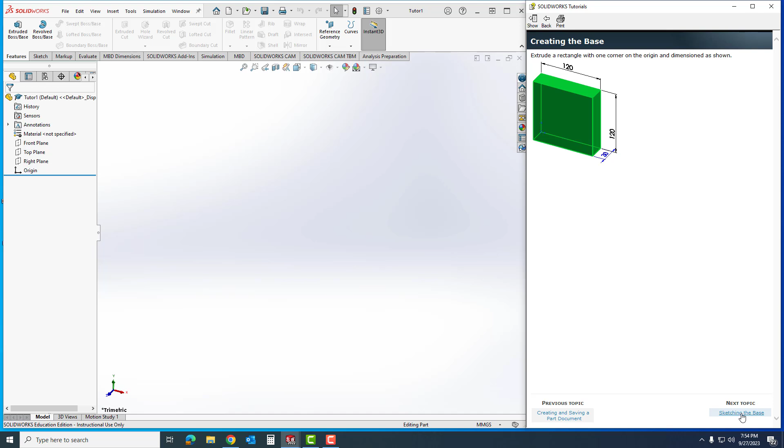So I'm going to extrude a boss and pick a plane. This wants me to pick the front plane, so I'll select my front plane. I'm going to go to Corner Rectangle and select the middle of my part right here—notice how it snaps to it.

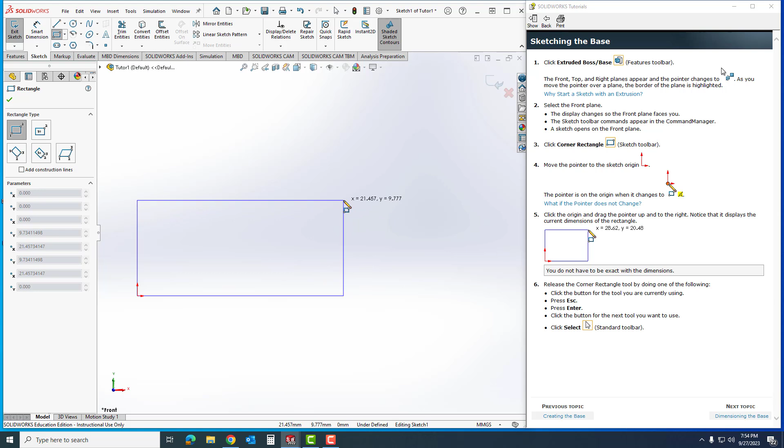I'm going to come out and keep it kind of close, so obviously my block gets kind of small. Using my scroll wheel, I can zoom up to make it look a little better. Now that I'm closer, I'm just going to roughly put it to the dimensions on here. Once I get there, I'll hit escape, go into the select menu, and hit Dimensioning the Base. So we have everything deselected, so it's not going to keep trying to make squares, and I'm going to hit next.

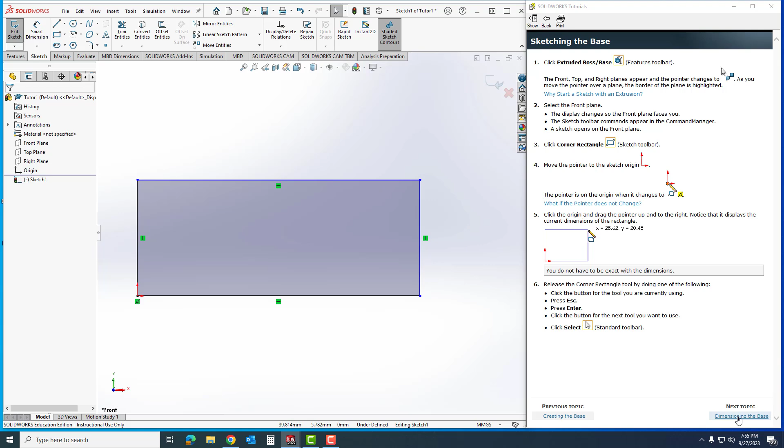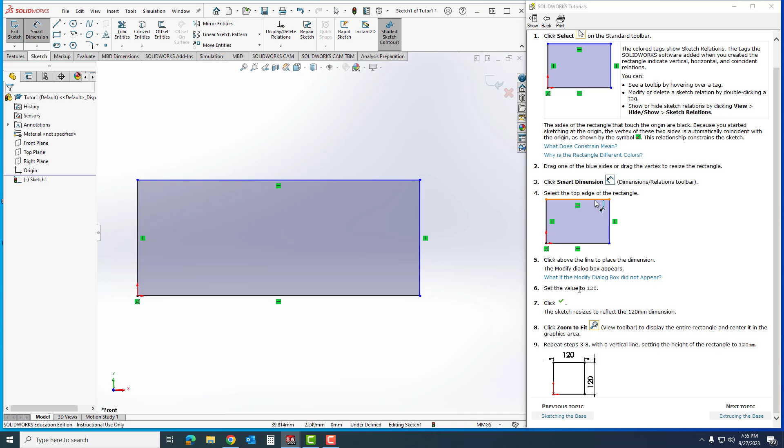Now it has items showing the constraints and some readable areas, but I'm going to go to Smart Dimension, right here, and dimension my part as it shows down here. I'm going to set my values on the box to 120. So I'll click, go 120, accept, and do the other side 120 and accept. Then I'm going to zoom out so I can see my whole part.

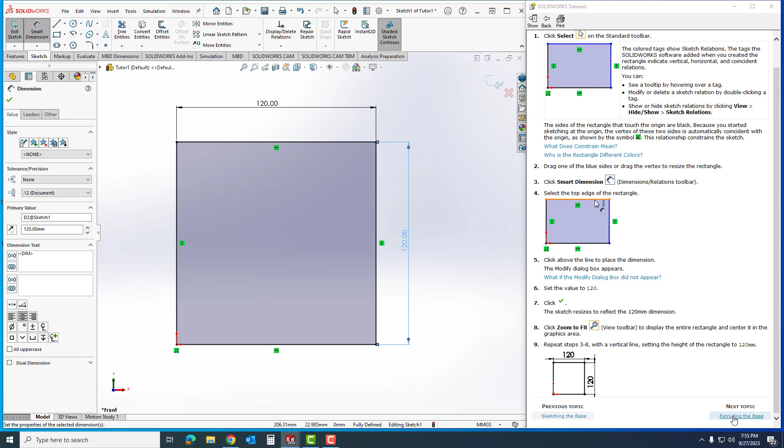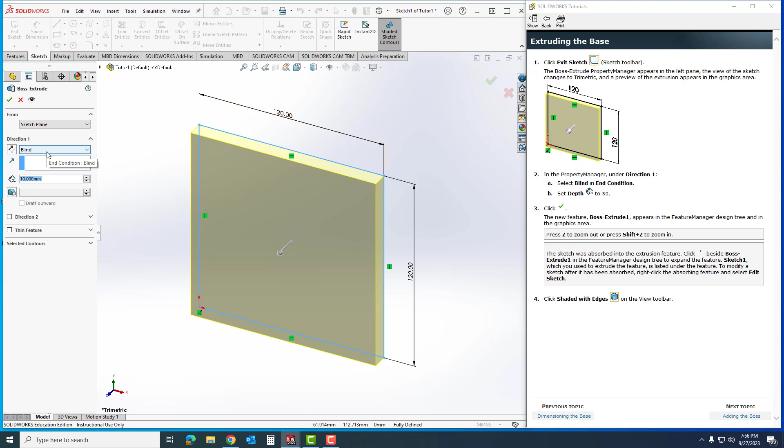From here, I'm going to hit Extruding the Base. I'll hit exit sketch, and it comes out to this isometric or trimetric view. From here, under my property manager right here, I make sure my end condition is set to blind, which it already is, and I set it to 30 and hit enter so I can see what it's going to look like. Once I do that, I hit OK, and it gives me my block.

And I like to click off of it to see what my block looks like. It is selected for the shaded areas, and if you're wondering where that is, it's right here under the toolbar—shaded with edges.

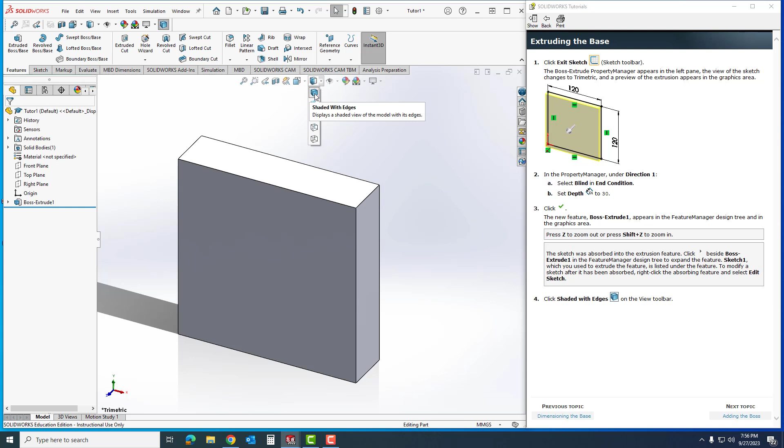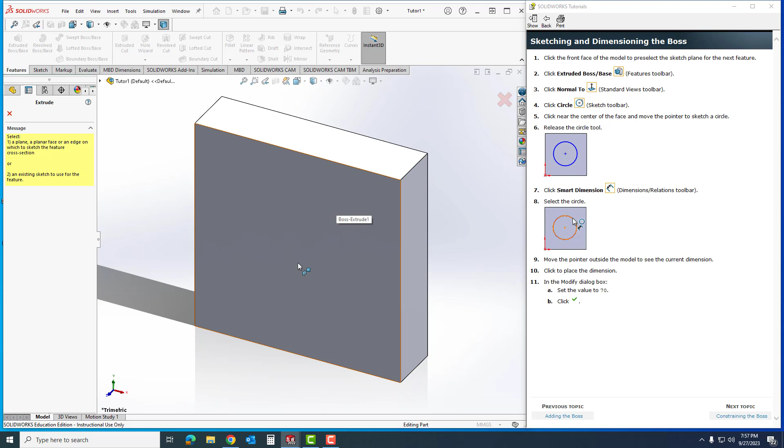So sketching a boss, we're going to go to Extruded Boss/Base, and I like to select this surface. Sometimes when you hit Normal To, the software can go in its own direction, so I like to click this, which goes normal to this surface.

Next I'm going to click on Sketch a Circle, and it doesn't matter where I put it, so I'll eyeball it close to the center. I'm going to click on Smart Dimension, click the outside of the circle, drop that dimension, and type in 70, then hit the check mark—or I could hit enter on my enter key. And I'm going to hit OK.

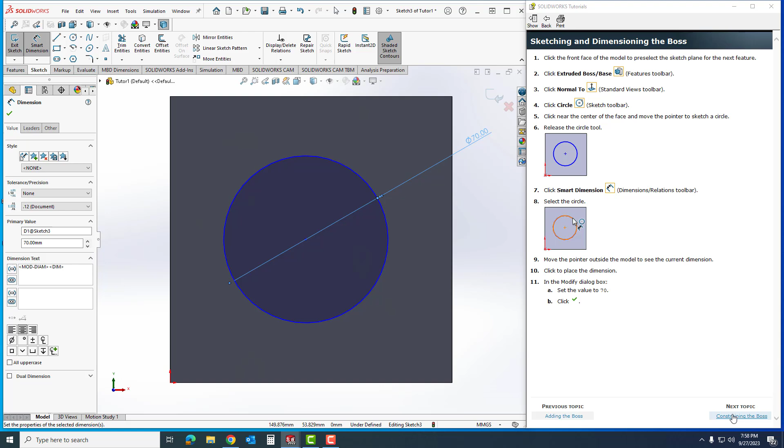Now we're going to constrain the boss. I'm going to use Smart Dimension, which is already selected, and click on the top line. Then I'm going to come to the center of the circle and click again. I'll drop that dimension over here and set it to 60, then check mark.

Now I'm going to do the same thing over here. I'll select this line, then select the center. If you wanted to select the center first and then the line, you could also do that. Set it to 60, check mark, and now everything is constrained.

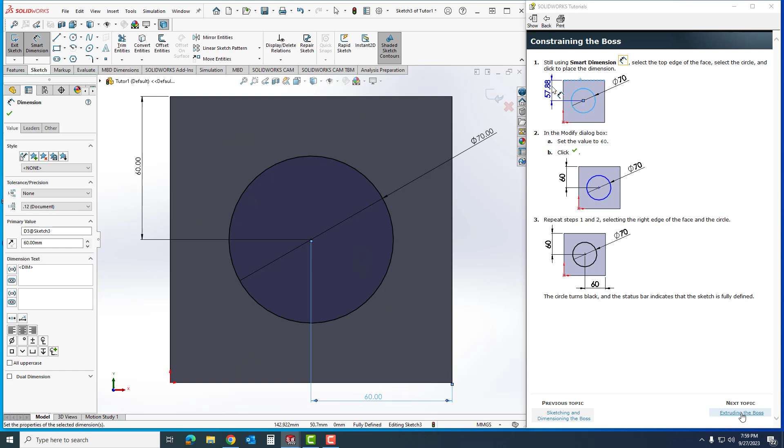So now we're going to extrude the boss. I'm going to exit the sketch, and if I want to bring it to trimetric view, I can go to the orientation and click trimetric view. That's just if I want to see this visual.

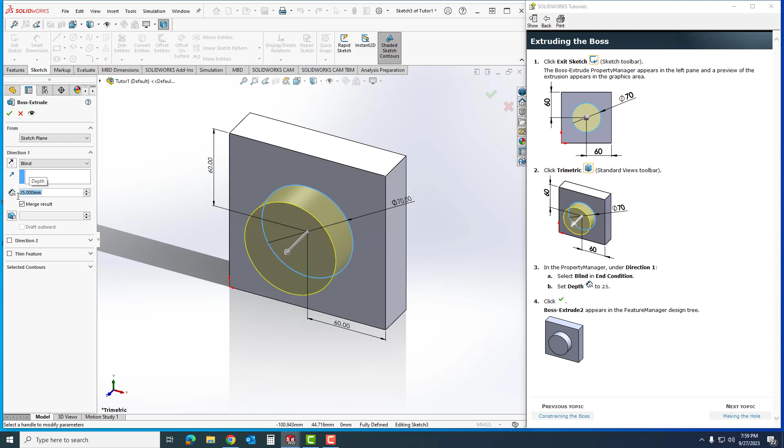If you'll notice, blind is still in the end condition. It wants us to set it to 25. I'll hit enter to give me a preview of it, and then I'll hit OK. That is now done, and it appears in my project tree.

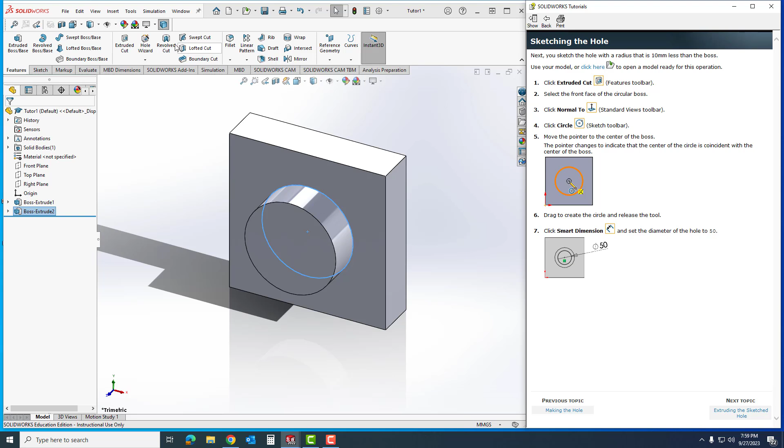So I'm going to hit next, making a hole, to put that hole into my part. I'm going to go to extrude cut. I like to click on the surface that I'm going to be extruding to. Also, you can click that surface and then hit extrude, and it works both ways. There's a lot of ways you could do it. This is how I'm showing you.

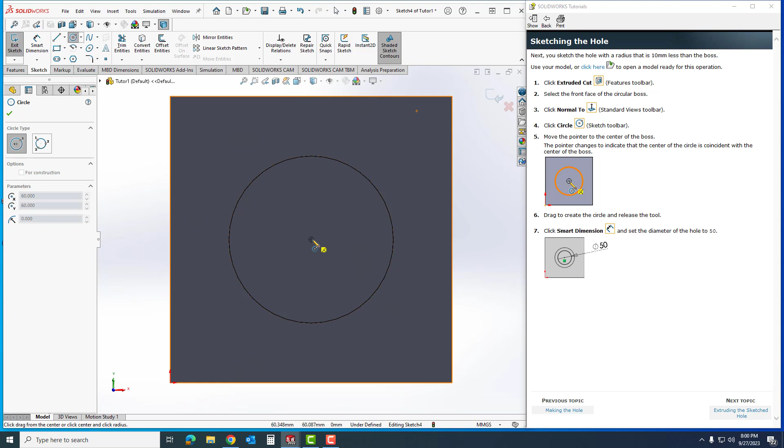I'm going to click circle. Now this time I want it to be in the center of it. So I'm going to put my cursor right here, come to the center, and you'll see it shows that center peg. We want those symbols to show. Now I'm going to click, open up my circle, and drop it by clicking again.

Now I'm going to smart dimension it by clicking here, clicking on the edge of my hole, and I'm going to click 50 and click OK. So now I have that fully constrained.

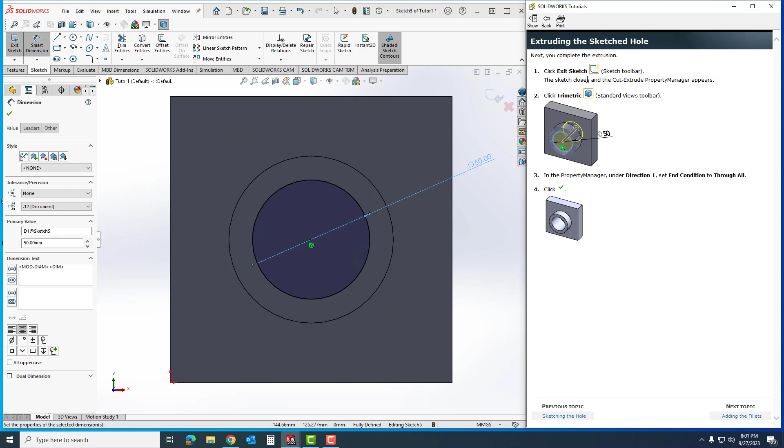So now I'm going to hit next. It's going to ask me to exit the sketch, and then I'm going to go into trimetric view, and then you'll notice that it says in the property manager under the direction, the end condition - we're going to change it to through all. Then I'm going to hit OK. If you'll notice, by holding the scroll wheel, I can rotate my part to see that it did go all the way through. So next we're going to do is adding the fillets.

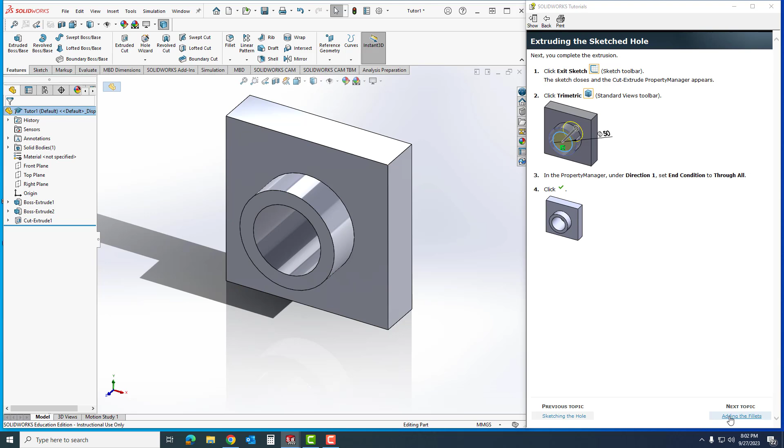Now we're going to be careful on our clicking here. We want to make sure we grab the right positions. So this is what we want to achieve. Now we're going to go through the steps on achieving it.

So the first thing I'm going to do is click on fillets. Under type, it does have the right constant size fillet selected. I'm going to select the front face of the base, and then I want to change the parameters to 5. So I'm going to hit 5. I'm going to click off of it.

Now notice how it only shows that area right there. So I'm going to go to full preview, and now it's showing me a full preview all the way around just like this. The next thing I'm going to do is I have to select the 4 corners at the base.

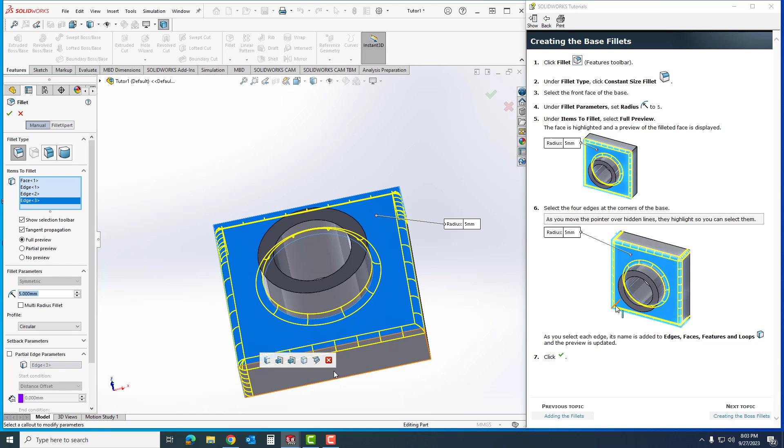So I'm going to click these corners, and take your time. Remember, I'm going to hold my cursor down to rotate. I'm going to click, and then I'm going to click. As I rotate, I can see that I have all the right ones selected. At this point in time, I'm going to select OK, and then we're going to keep on going.

Now we're going to create a fillet on the boss. So we didn't create one down here. That's where we're going to put it.

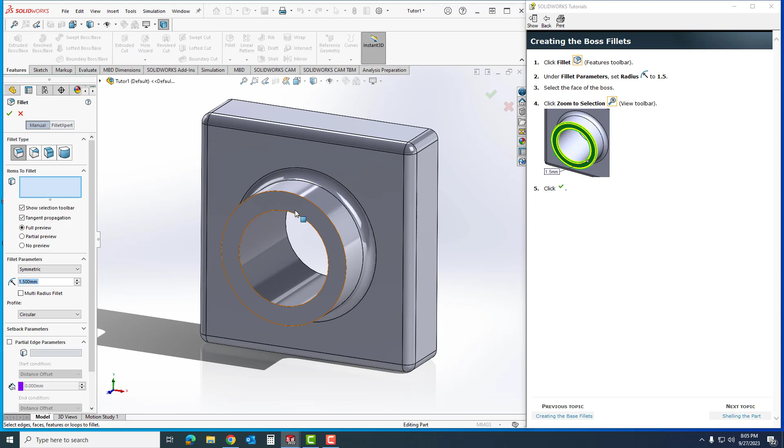So I'm going to go back to fillet, and we're going to select the face of the part. So right here, the face of this boss, and it's already set to 1.5. If you want to, you can always just click it again to make sure nothing changes. I'm going to go to full preview, and you can see the face of the boss is selected, and then I will click OK.

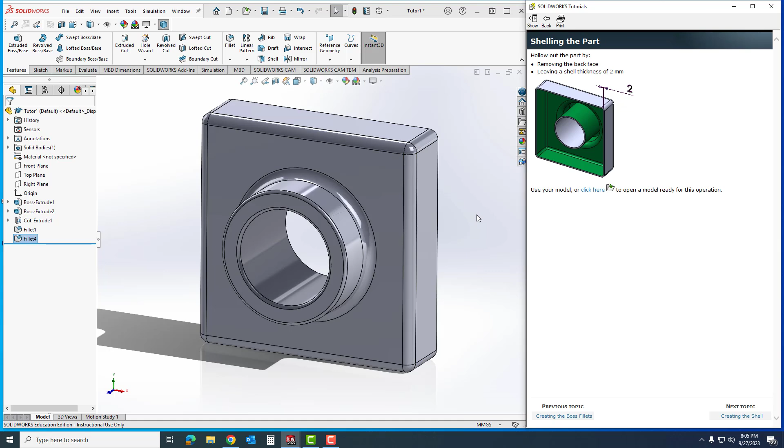So next we're going to go is to shelling the part. So I'm going to use my cursor to roll it around, okay? And then I'm going to select that surface, and then I'm simply going to select shell. So if I click on the next steps, that's exactly what I'm doing.

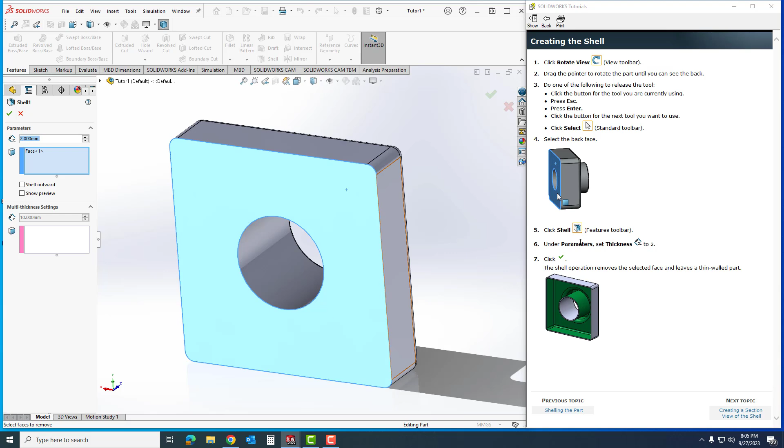So I've rotated it, I've got a hold of the back, I'm going to click shell, and under parameters, I'm going to set the thickness to 2. And I'll hit enter. Now once I click OK, you'll see that it is all there. So that looks really good.

So now I'll hit creating a section view. So I'm going to go back into trimetric mode.

And then I'm going to go right here to my viewing bar. But if you'll notice, it's right there, so it's a little bit to the left of where I'm usually at. So I'm going to select it.

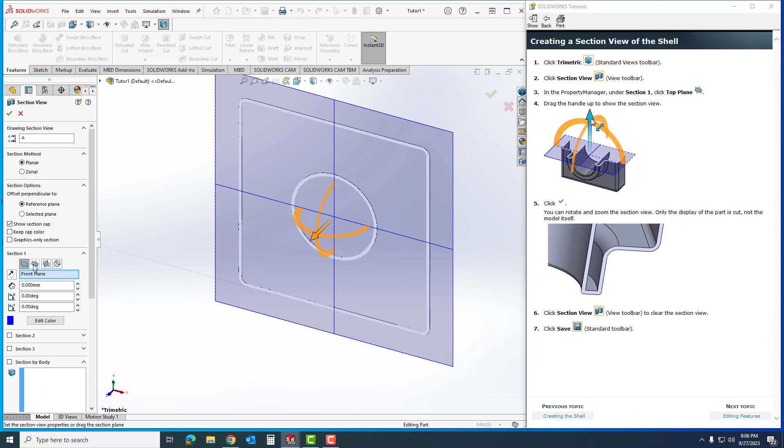It wants me to come down to the property manager under section 1 and click top plane. So under section view, I've got section 1, front plane, top plane, which is what it wants me to do, and then these other planes if I wanted to use them. So it wants me to grab my top plane, then grab the arrow, and pull it up to about right there. And then I'm going to hit OK.

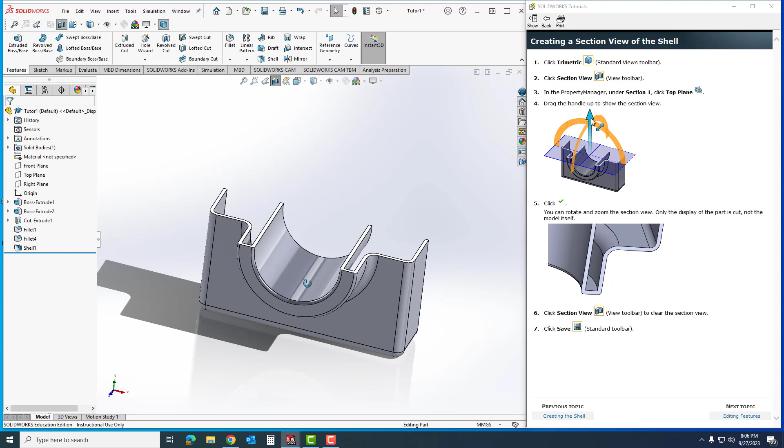I can rotate this view to see different areas of the part, which is very useful depending on what you're looking for. And when I'm done, I simply click it again. Now I'm going to save the part, so click save, and we're good.

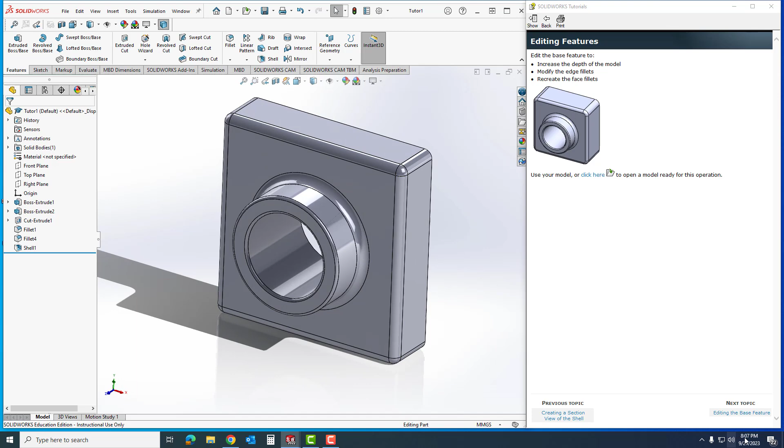Now we're going to go to editing some of the features. We're going to make some modifications to this part, so I'm going to go into editing the base feature. In trimetric mode, we'll put it there.

I'm going to double click on the boss extrude over here. So when I double click it, not a lot happens, it's just going to show me my dimensions. So I'm going to double click on the 30, and I'm going to change it to 50.

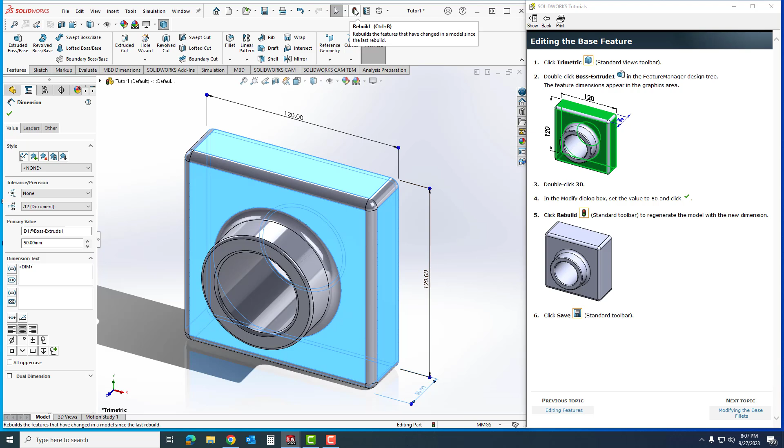I'm going to click OK, but it hasn't rebuilt it yet. So right here, I'm looking for that button right up here at the top. When I click it, if you watch my view, it rebuilt everything from that base, which is very helpful. And then I'll click save.

And then we'll go to the next one, which we're going to modify our fillets. The base fillets were created in a single feature. We're going to change them, so in this feature manager design tree, we're going to click on fillet 1.

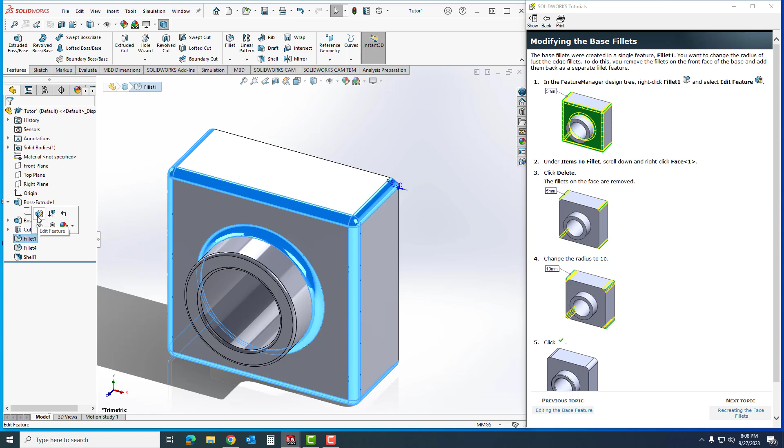When I click on it once, you'll notice there's a little window that pops up. I'm going to come up here to edit feature. In here, I'm going to come down to where it says items to fillet. I'm going to right click on face 1 and click delete. So there we go, all those fillets are removed.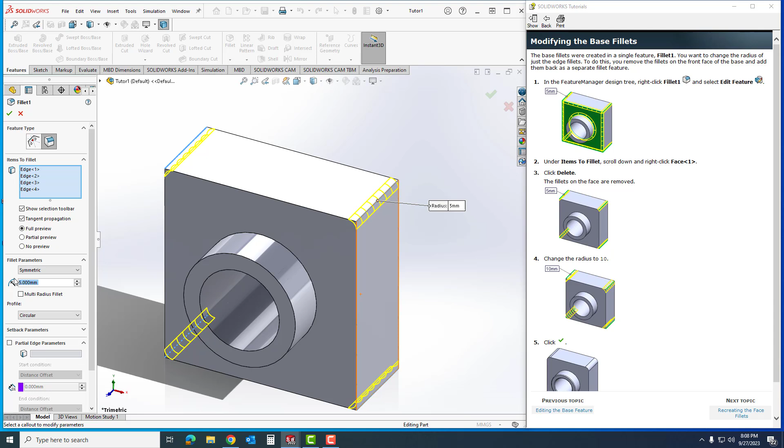Now the remaining, I'm going to change them to 10. So I'm going to type in 10, hit enter, and you notice how they did get bigger. Now I'm going to click OK. So I've gotten rid of the top fillets, and now I've increased the size of these.

We're going to go to recreating the face fillet. In the feature manager tree, we're going to place the pointer below the shell. So we're going to come down here, grab this line, and we're going to place it above shell and let go.

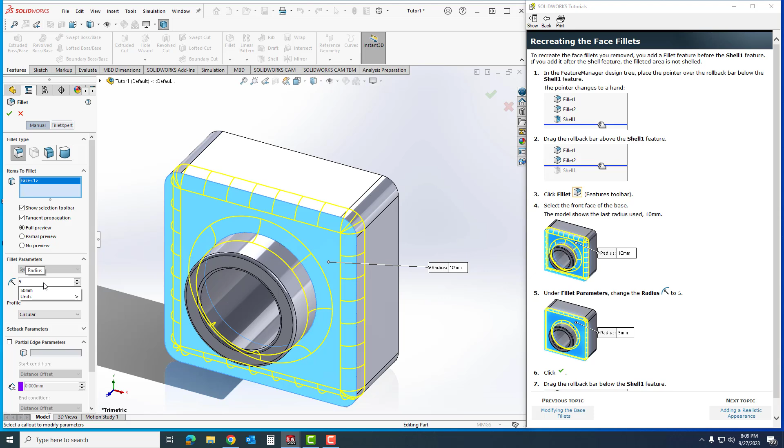Now from this location, because that's where we're currently at, I'm going to go back into fillet, and then I'm going to come down and select the face of the base, but we're going to change the radii to 5. So we're going to go 5, enter. Notice how it got smaller. And I'm going to click OK.

Now I'm going to drag the rollback bar below the shell feature again. And now it has activated it, but it has taken and put the shell back onto it.

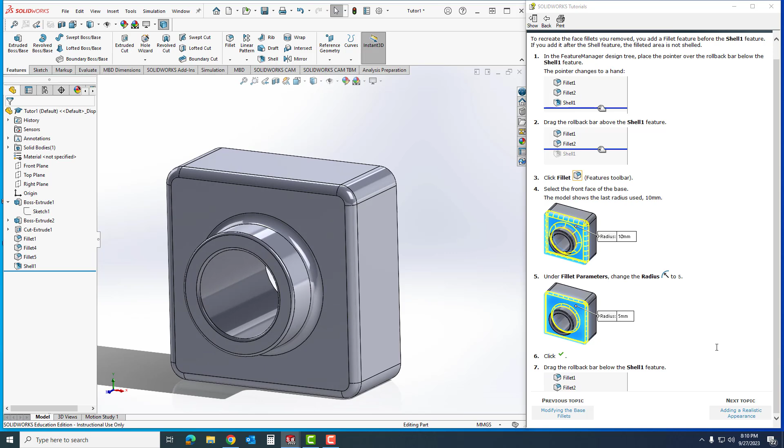So now we're going to add realistic appearance. Realistic appearance will work if you have a good video graphics card that Solidworks recognizes. So we're going to see if it'll work for us. I'm going to go and click shaded view on the toolbar.

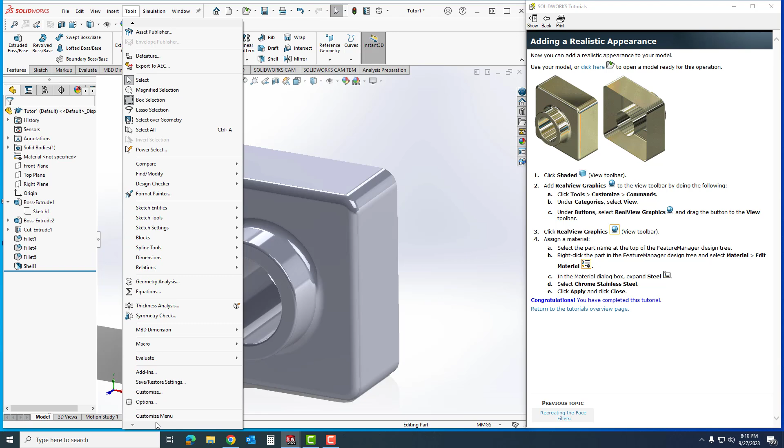So up here, I'm looking for shaded. I'm going to add the RealView Graphics symbol right here to the viewing toolbar. So I'm going to click on tools, and come down to customize, which is going to be down here. I'm going to go up to commands, and under categories I'm looking for view.

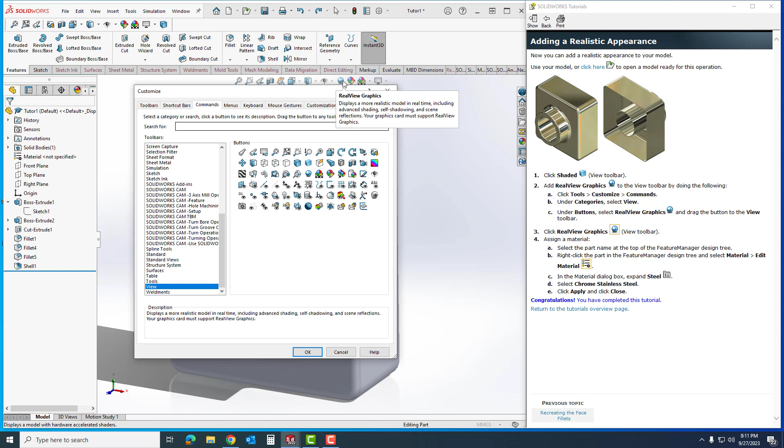So I'm going to scroll down here to view, click it, and then find that symbol, which is this one right here. I'm going to click and hold, and drag it right up here, and drop it so you can see that it is there. So I'm going to click OK.

And if you'll notice, my RealView Graphics is not grayed out. If yours is grayed out, that means your video card is not recognized by Solidworks, and this is about as far as you can get.

So I'm going to come up here to my Real View Graphics and click it. I'm going to click on my part up here, right click it, and I'm going to go to Material, Edit.

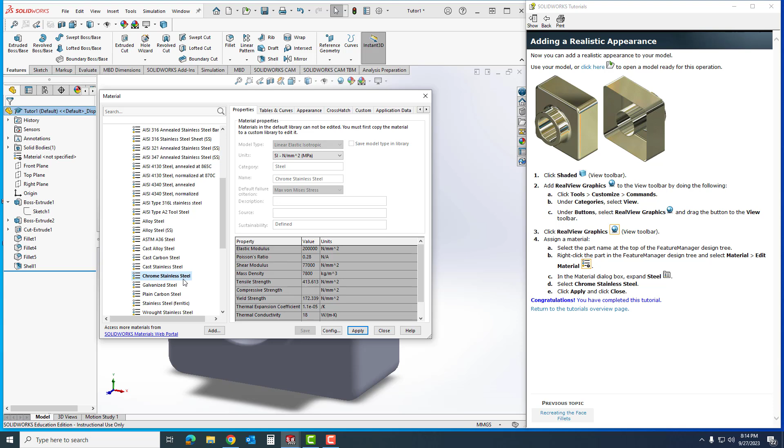And you can see my steel in my drop down. I'm going to select Chrome Stainless Steel. So right here, I'm going to click Chrome Stainless Steel, and click Apply. Once I click Apply, I'm going to click Close, and my part now has everything done.